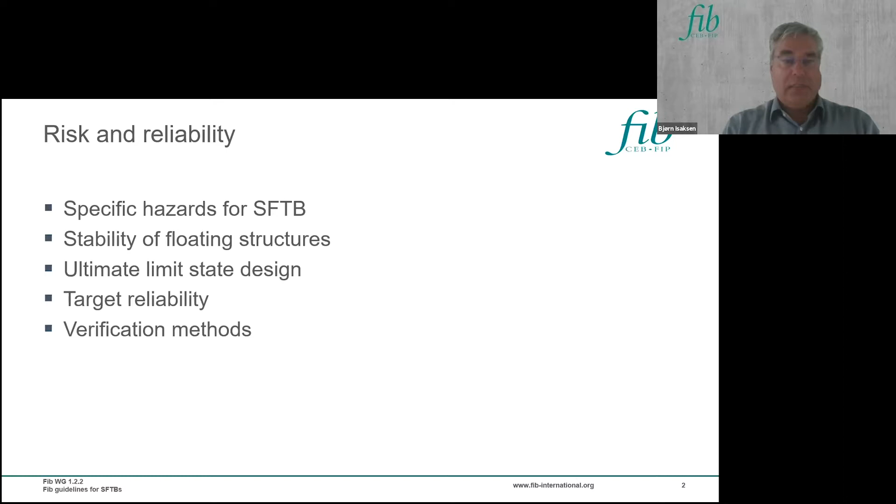Specific hazards for SFTB and some site-specific scenarios may be ship impact, submarine impact, sinking ship, unintended dropped anchor, dragged anchor, landslide, underwater landslide, tsunami, seismic activity.

And I have separated this in specific scenarios, and more in general, we have consequences of leakage, fire and explosion, and consequential damage or component failure that leads to system failure. The hazards listed here call for robustness and redundancy in design.

The ISO 2394 general principles on reliability for structures given in 2015 introduces the criteria and gives guidance on how to perform a risk analysis. We are here talking about risks during construction, installation, and operation. And it is necessary to consider construction and installation, not only operation of the SFTB.

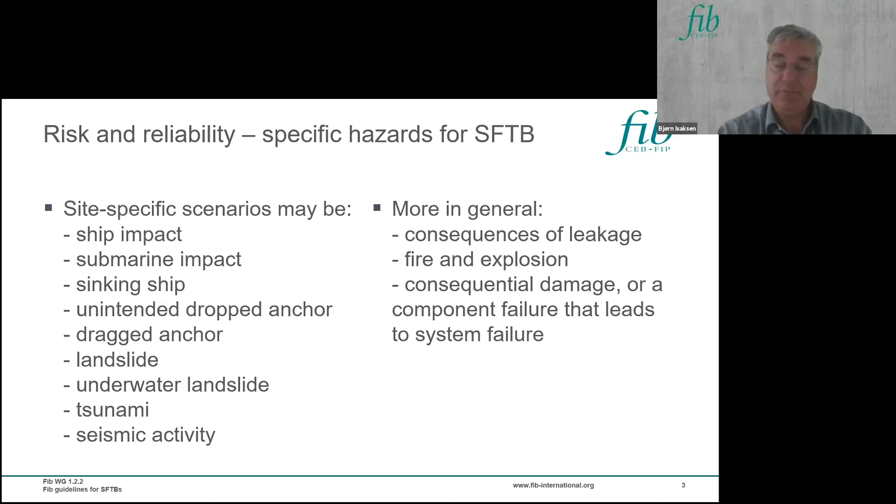Stability of floating structures. Net buoyancy. The SFTB is partly a weight buoyancy stabilized structure, so that a robust regime for the net buoyancy will have to be established. The design should be based on upper and lower characteristic values for self-weight and buoyancy, including geometric and density tolerances.

Weight and ballast reserves for the tube bridge should be specified and coupled with a weight control program. The design assumptions on permanent self-weight can be checked by the possibility of weight tuning while afloat, for instance in dock. Parts of the variable self-weight to consider may be time dependent, such as marine growth and water absorption of concrete and solid ballast.

Mooring system. Design criteria for tether slack control during dynamic response of the SFTB will have to be defined in order to warrant global stability. Normally, the requirement on net buoyancy is that tension shall be maintained in all tethers for the most onerous combination of unfactored characteristic loads. Whereas tether slack can be accepted in the ultimate limit state without causing structural failure or tether unlocking.

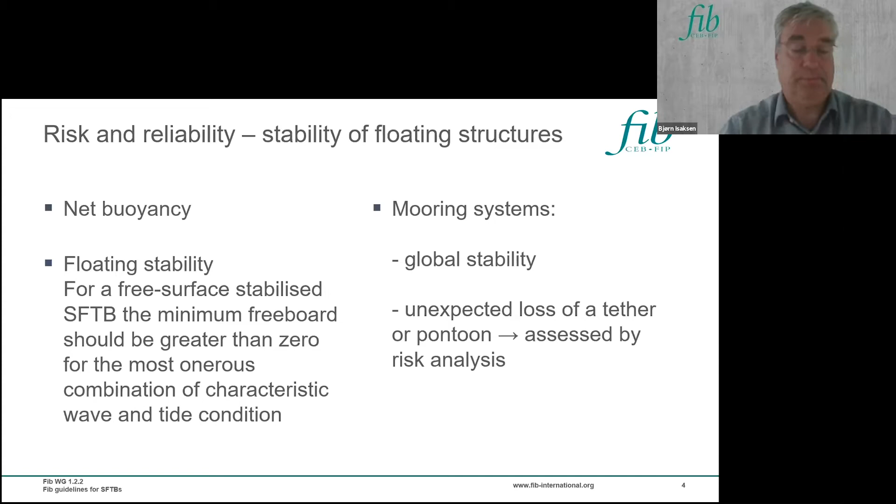Ultimate limit state design. First, let me comment on some important principles in Eurocode. Design situations. Design situations are categorized as persistent, transient, accidental, or seismic. These categorizations draw together families of circumstances or conditions that the structure might experience during its life.

Persistent design situations refer to conditions of normal use, such as for a bridge, they will include the passage of heavy vehicles, since the ability to carry heavy vehicles is a key functional requirement. Transient design situations refer to circumstances when the structure itself is in some temporary configuration, such as during execution or maintenance. Accidental design situations refer to exceptional circumstances when a structure is experiencing an extreme accidental event.

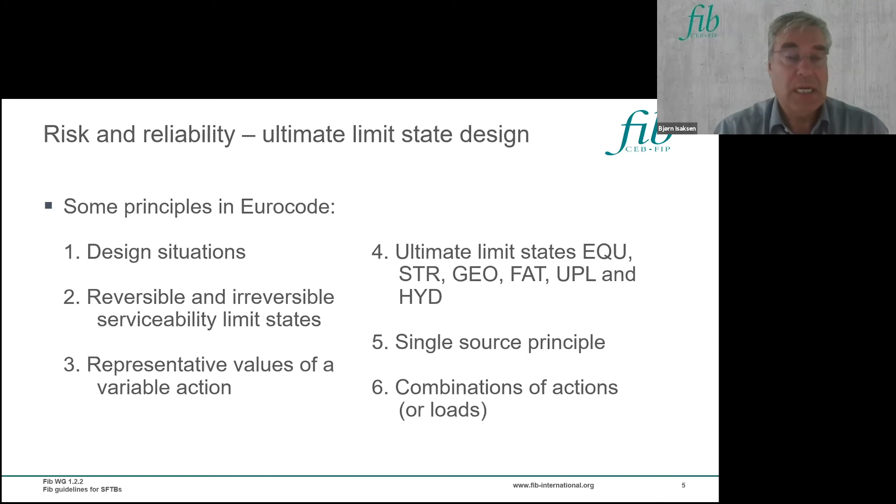Ultimate limit states. Limit state design is widely accepted and is also recommended for design of SFTB. 1. Exceedance of static equilibrium, including loss of buoyancy and slack in tethers. That's EQU. 2. Exceedance of strength or strain limits. That's STR. 3. Exceedance of fatigue strengths. That's FAT. And 4. Exceedance of geotechnical equilibrium and deformation limits. That's GEO.

One example. Leakage water shall be treated differently compared to rock tunnels or immersed tunnels. Leakage may be relevant in the ultimate limit state of static equilibrium.

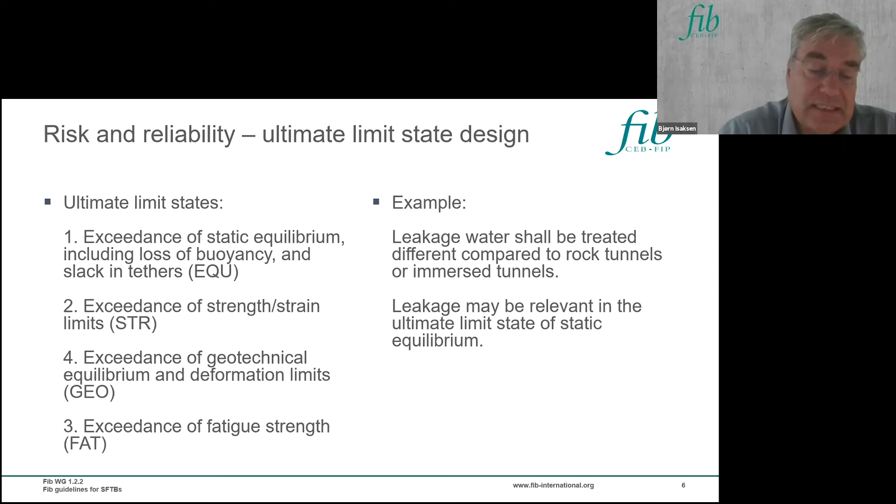So, target reliability. To meet the target reliability, SFTBs might need higher requirements and higher safety margins compared to other structures, for instance, bridges, since SFTBs will be prone to more and different risks. And second, SFTB is a new structural concept.

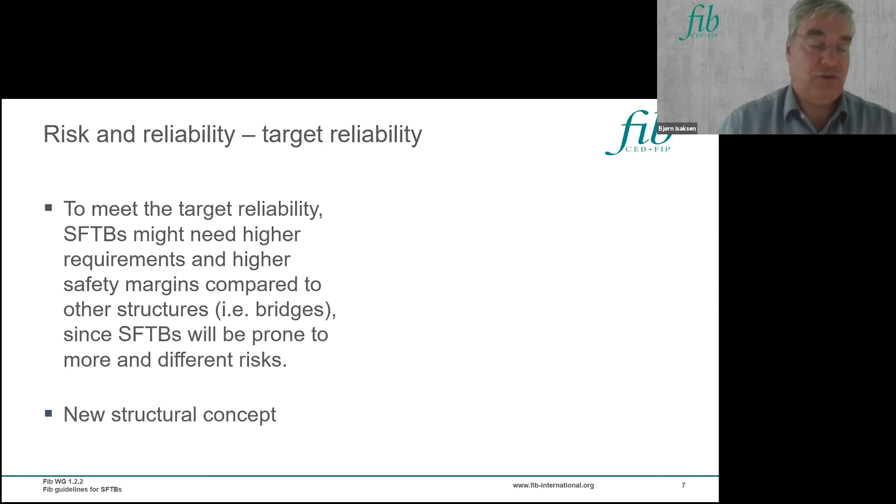Considering the limit state function, for instance, strength minus load, it should always be bigger than 0. And the statistical variables involved in that expression. Then make a mathematical transformation of the variables to the normalized space. And if you see this in 2 or 3 dimensions, this can be shown graphically. And beta is then seen as the distance from origo to the design point.